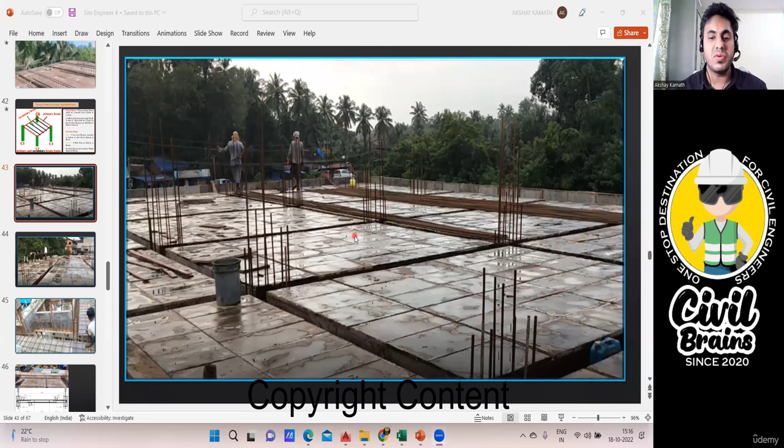In this lecture, we will see how to take out the slab centering quantities and also the slab concreting quantity. When I say slab centering quantity, all these are my slab centering quantities.

See this part, here. You can see all these pieces kept - these are the shuttering plates which have been kept. So this is my centering.

Why am I using the word centering? Because for the slab it is a horizontal element. For the beam, column, and footing, since it is a vertical element, we call it shuttering - everything was vertical there. But here we are placing it horizontal, so hence we should call it slab centering materials.

So how do you find that? It's very simple, I'll go back to the drawing again. Right now I'm in the first floor level layout. All the slabs have been given here. How do you find the slab quantity? It's very simple, first I'll tell you how to do the numbering.

Everywhere you can see the slab - one slab here, two, three, four. So what I've done, I've given a number to that. This is my first slab, I've given a name S1. Similarly, this is S2, this is S3 - okay, two times it's written S3, I'll delete this. So this is S3.

This slab is S4, then S5, then again S6. Then again we don't have a slab here. This is S7, S8, S9. In this way I've given the numbering from left to right, from top to bottom. You can give any name - you can even start naming from here, giving this as S1, S2, S3 and so on.

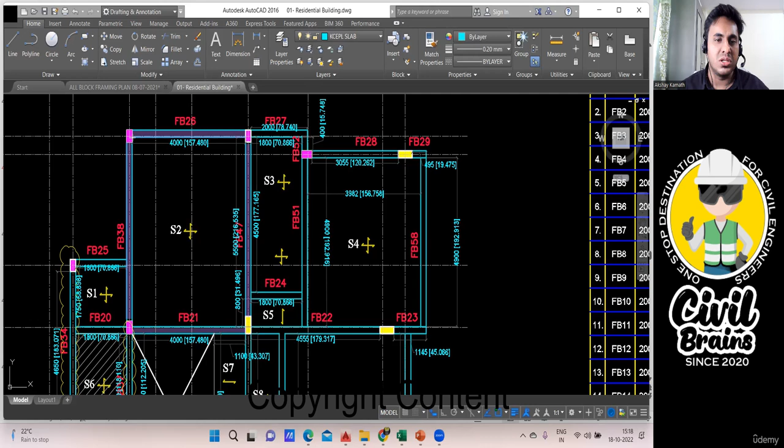Now, whatever is left out, that is the middle portion - this much will be your slab centering area. Agree with me? In the green color only your slab area will come.

Now how do you find it? From the AutoCAD, you take this outer to outer distance - that is from this column outer to this column outer. You take the distance, I already taken it - it is 4 meter, that is 4000 mm. So the breadth is over.

Now we come to this part. You take the distance from this beam outer to this beam outer - how much is it? 5500. You got the length, you got the breadth. If you multiply, you'll get the area. The slab will always be in area because centering quantity or shuttering is in square meter. I'll multiply 4 into 5.5 to get the slab centering area.

Got it? So practically, if you want to see this, I'll show you here. So this is how it looks practically. You have a beam here, agree with me? You have another beam running here, then another beam running here, then another beam running here - 4 beams are there.

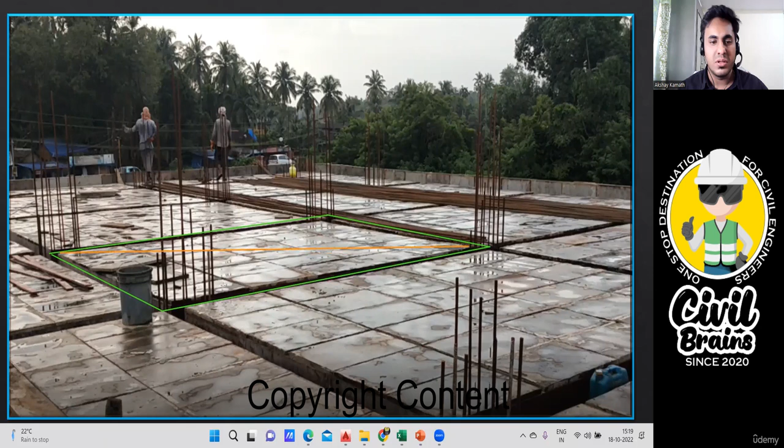In between this, whatever you have, I'll put it in a different color with an X mark. This middle portion, whatever you can see, that is your slab centering quantity. So we are trying to find this particular quantity - you're getting my point? I already told you, we need to measure the distance from here to here. I'll show you this in another slab if you want. Here I'll tell you how it has to be done.

Already you know that, so this is one slab panel what I have. I'll start from here. I'll take this length from this beam outer to this beam outer. Again, this beam outer to this beam outer. Both are same breadth. And from this beam outer to this beam outer, fine, I'll get this length. I'll get this breadth. If I multiply, I'll get the slab centering area. You're getting my point? Very simple.

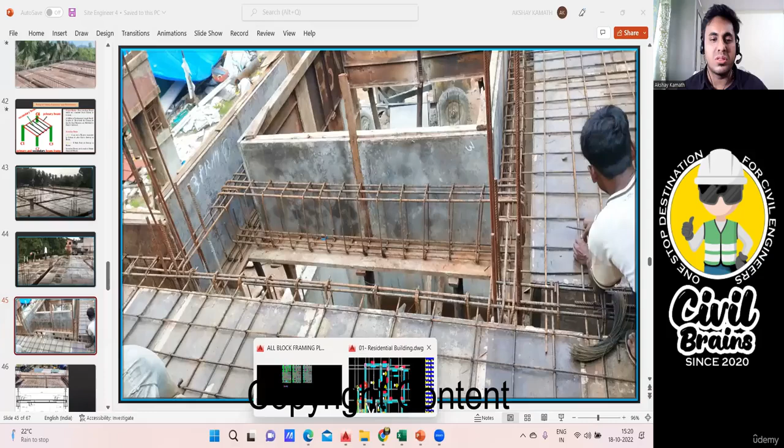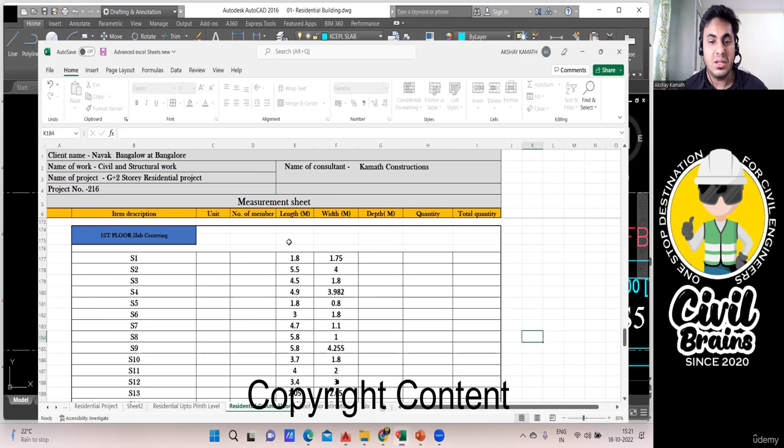So what I've done in Excel sheet, already I've done all those inputs. You just have to copy it or do it yourself. Like first floor slab centering, the length is first, I'll go with S1. I've written the name S1. I'll show you where S1 is. So this is my S1. So in S1, tell me what is your length. S1 is 1.8 meter and this is 1.75 meter. So 1.8 and 1.75, go to the Excel. I've written 1.8 and 1.75. Now I can come to S2 slab.

Where is your S2 slab in the drawing? So this is my S2 slab. What is the length? The length of S2 slab is, this is 4 meter, this is 5.5 meter. Whichever is bigger, you consider that as the length. So I'll consider 5.5 as my length and breadth is 4 meter. It doesn't matter, the answer won't change, but we'll follow this method. So 5.5 is my length and width is 4 meter. You're getting my point? So in this way, everywhere I've done the calculation.

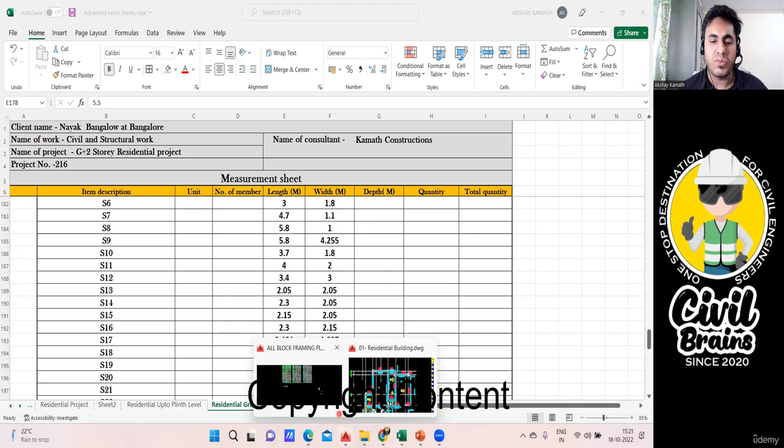And there is one small thing which you need to understand. In some of the slabs, they put this X mark. X mark means there is a cutout. Maybe there is a staircase coming, maybe there is a lift portion coming, or you want an opening in that portion. So when you prepare the drawing, you give an X mark. That means no slab is coming, so you don't have to consider this area.

Whereas you see, in this entire slab, this much is cut out. See, this is the actual slab. But in this slab, this much portion we have cut out. That means there is no slab in this portion, but the remaining portion you have a slab. So what I'll do, I'll take this outer to this outer length, which is 1100. And from this outer to this outer, I'll take a length which is 4.7 meter. For S7, I'll input the same thing in the Excel sheet. Where is my S7? You see here, 4.7 by 1.1.

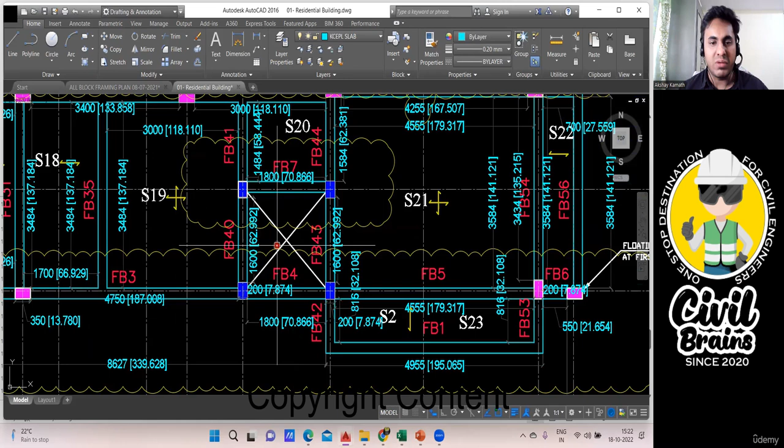You're getting my point? So in this way, try to calculate all the areas and fill in the Excel sheet. Again, you see here also you have a cutout, because if you go to the plan - I don't have the plan right now - here there is a lift coming, so that is an X. So if there is a lift coming, you will not put a slab, only in the top slab. In the multi-level, you will be having a slab coming in that portion. So you're getting my point? In this way, you're supposed to take care of all these things.

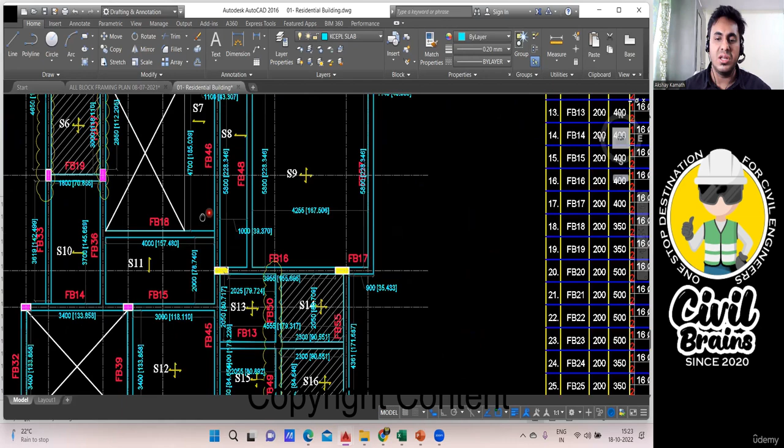And everywhere you do this. Similarly, see, these people have shaded something here. You can see this shaded portion. This means that it's a sunken slab. You have one shaded here, there's one other, two shaded here. Sunken slab in the sense, in the bathroom portion, when you give the slab - if this is my main slab, this is my ground level slab - my bathroom slab will be at least 200 or 250 mm down, and this will be the bathroom level slab.

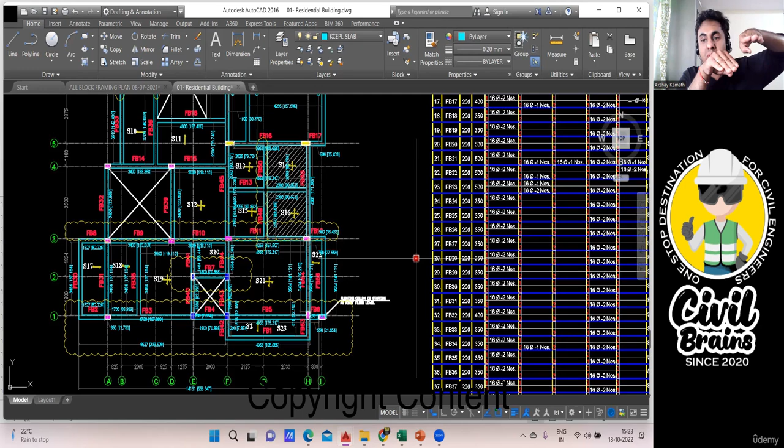You're getting my point? So this height will be 250 mm. Why do we do that? So that we can take the plumbing works and all, because in the bathroom you want water and all, no? The plumbing line will be taken, then you're going to put the brick bats, and then you will bring it to this level later. But initially when you do the casting, your main slab will be at this level and the sunken slab will be at this level. So wherever this line they have drawn, it's a sunken slab. In the remark, you can write sunken slab, for example S13 and S14.

No, this is 14 and 16. So I'll go to the Excel sheet. S14 is written here, you can mark this S14 as a sunken slab, just for your understanding, you can do that. But there won't be any change in the calculation. In execution, what will happen - wherever there is a beam bottom, no...

If this is my beam, my sunken slab will be at this level, attached to your beam bottom. The bottom portion of your slab will be at the beam bottom level. That's it when you do the execution. But in quantity estimation, there won't be any changes for the concreting and all, you can do that.

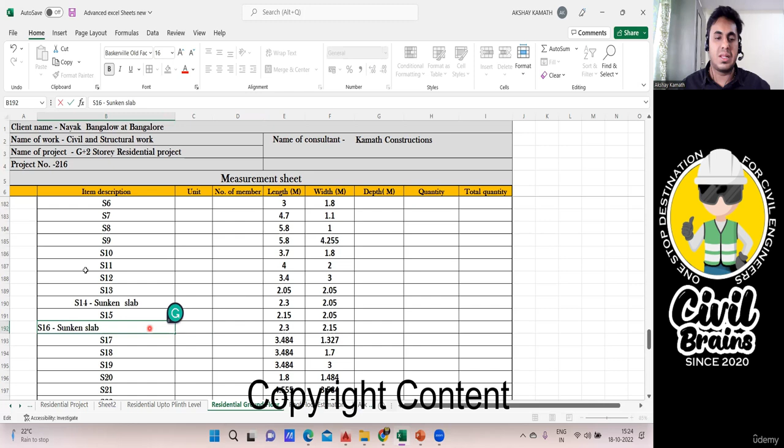14, written as sunken slab. You can write sunken slab just for your understanding. Sunken slab, that's it, okay. And rest all things, fill the value.

Now number units, since I'm doing a centering quantity, it will be in square meter. I'll drag it everywhere. So yes, 23 slabs are there. Sunken slab, and this number will be 1 only always. Number is 1. Now you want to find the area, no?

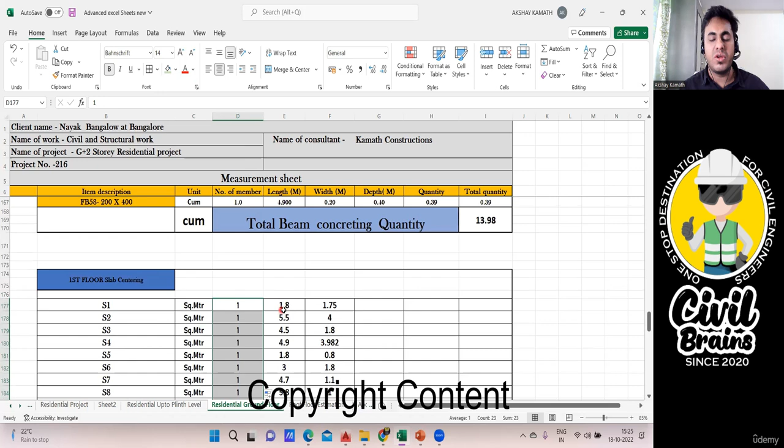So quantity, I'll write. So we know we have a length, we have breadth. This depth is not required. You can do a dash mark here. Bring it at the center, make it a little large. Okay, done. That means there is no depth portion.

Now quantity, quantity, I want to find area, no? So this 1.8 multiply by 1.75, area I'll get 3.15. Bring it at the center, increase the font, that's it. One I've done, just copy for others. Copy, you'll get all the answer. You can reduce that size. Yeah, done, okay.

Then again, coming to the total quantity, will be equal to 3.15 into number. Since here only 1 is there, so values won't change. Done, okay, this you can reduce.

Fine, now first floor slab centering quantity equal to, or I can just keep my mouse here, go to the option called auto sum. It will get selected, enter. So 184.60 square meter of centering is required in your slab. Simple, this is how you're supposed to do it. All the values I've taken from here, you also try to do.

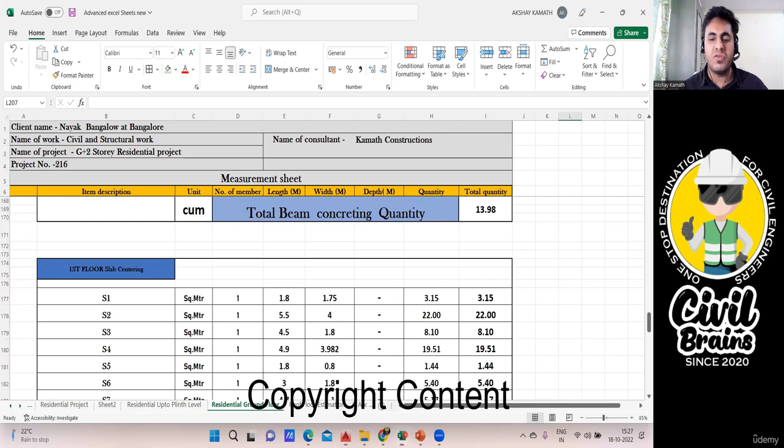Most of the things what I've done is correct. See, one thing, somewhere when I do the calculation, in some portion I may miss some value. So this is the final answer what I'm getting. If you're getting the same value, no problem. If you're getting somewhere close, like if some students get around 183, then you tell sir you got 184, I got 184.60, it's okay, doesn't matter.

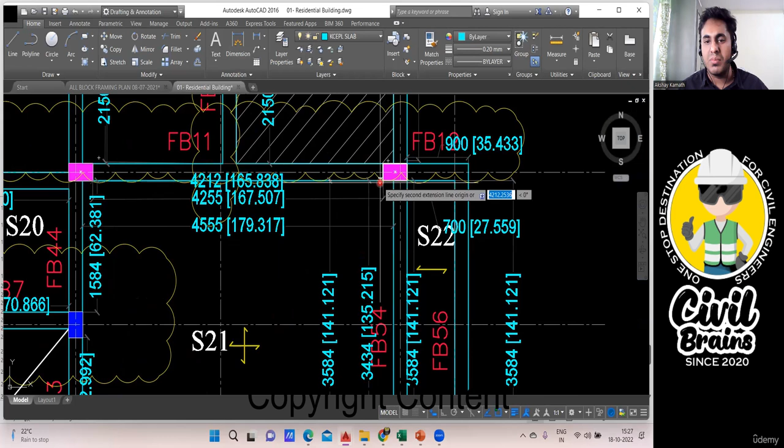It depends, because maybe either I might have made a mistake while taking the value from here. Somewhere here, instead of taking this from this end to this end, I might have stopped my mouse somewhere in a hurry, and I might have taken this 4212, where actually I should have taken 4255. I might have taken 4212. Usually I have not done that, most of the things I have double checked it. But in case if something happens, it doesn't matter.

Don't think that whatever answer you got is wrong. So it's okay. See, if there is a huge variation, then it is a problem. For example, I got 184, and if you're getting like 183 or 185, it's okay. But if you're getting like 150, then maybe either I might have made a mistake or you might have made a mistake. But if you're getting very close to this answer, or the same answer, well and good. If not, if you're getting like 183 or 185, doesn't matter, you can go ahead with that. Slight variation will be there, depends how you've taken the values and all, doesn't matter. Fine, so the first floor slab centering quantity is done.

This you have understood. Now, I'll tell you one more thing which is usually not required, but from site execution point of view, it is required. So this is the first floor slab centering total quantity. Now, when you do the execution of such slab on the site, you need to bring in such plates. These are the plates what we have, these are the centering plates. You can see this is my centering plate.

This is one plate, okay, this entire thing is one plate. In this way, we try to bring it, and then we try to arrange it. All these things are explained in my construction methodology course, where I taught you step by step how all these things are practically executed.

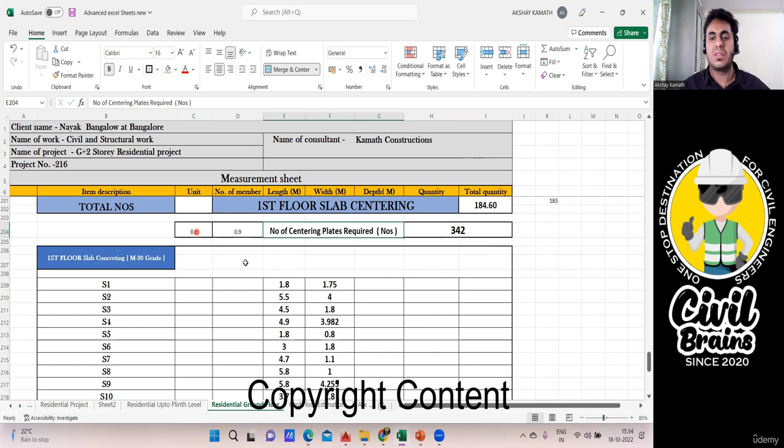That's it. So I hope up to here your concepts are clear.

So again, we'll do the slab concreting also. It's pretty simple. For slab concreting, whatever you did here, everything you copy. I think I copied, I'll copy from here once again. Same thing you have to copy, there's no changes in that. Copy and paste it here.

So make this as first floor slab concrete quantity. Now, since it's concrete quantity, this will be cubic meter. Change it, drag it this way, make it cubic meter everywhere.

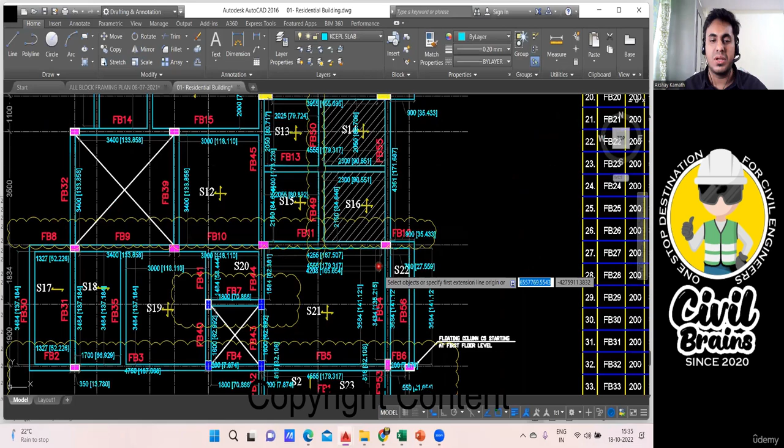Done. After that, I want this thing now. Length is done, length is same, breadth is also same. Here I want the depth of my slab. For the depth of the slab, you go back to the drawing. But here you won't get anything, depth of the slab isn't written here. You have to go to the slab schedule.

See, here there is a schedule of slab given. They have mentioned S1, S2, S3 - there are two types of slab, one-way slab and two-way slab. All these things I've explained in my site engineer course, what is one-way slab, what is two-way slab, how do you put that in. I'll not repeat that again.

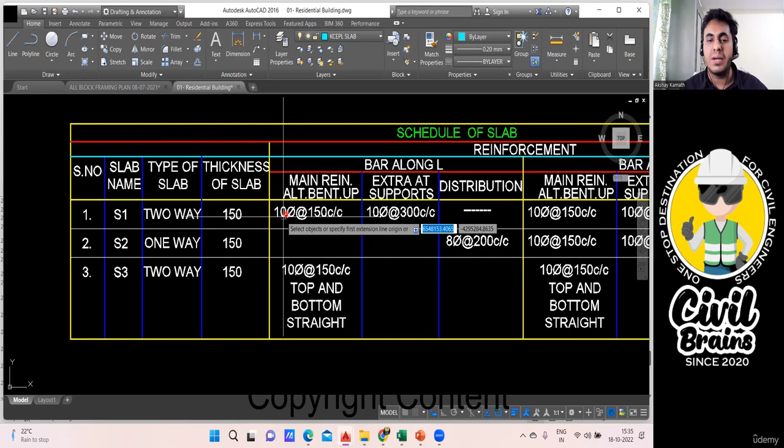You see the thickness of the slab given as 150, 150, 150. That means throughout, in all your slabs, thickness is 150. So our task becomes very simple. Just come here and write 0.15. That's it, I've written 0.15. That is the depth or the thickness.

Should you call that depth or thickness? It is thickness because it's a slab - for slab we call it thickness, for beam we call it depth. Okay, drag it up to here.

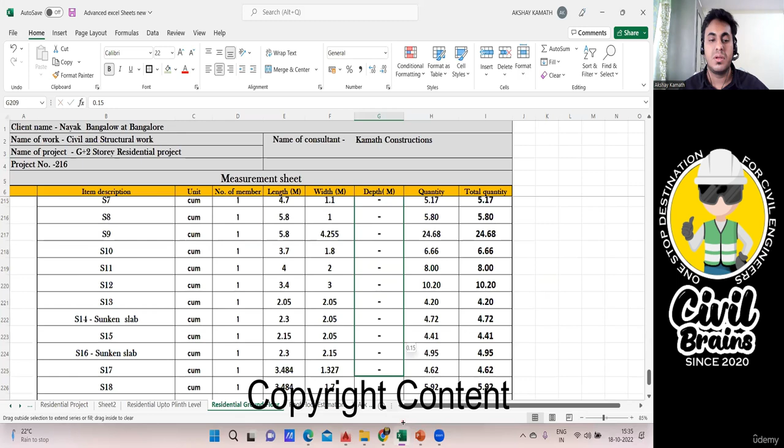Done. But again this Excel won't work out because when you did this row formula, you multiplied only 1.8 into 1.75 - you can see this and this you haven't multiplied, so we'll have to change it now, or you can multiply by 0.15 now. Fine, 0.47. Now just drag it everywhere, you get the total slab concrete quantity.

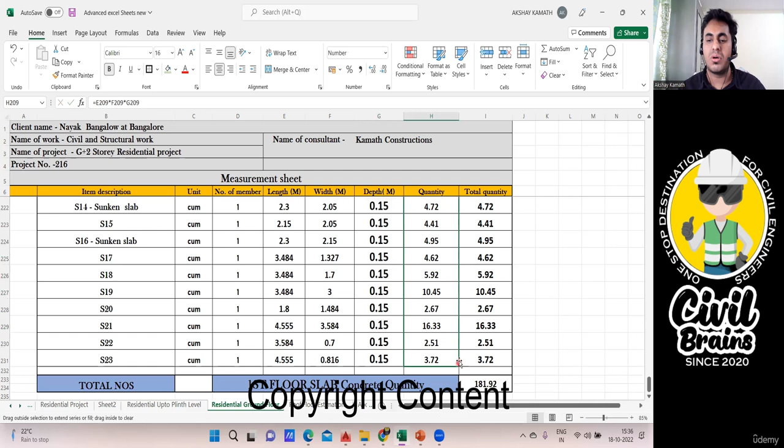Done. So you require how much? We'll verify one answer: 4.555 into 0.816 into 0.15 equals 0.557. Yeah, correct, no problem.

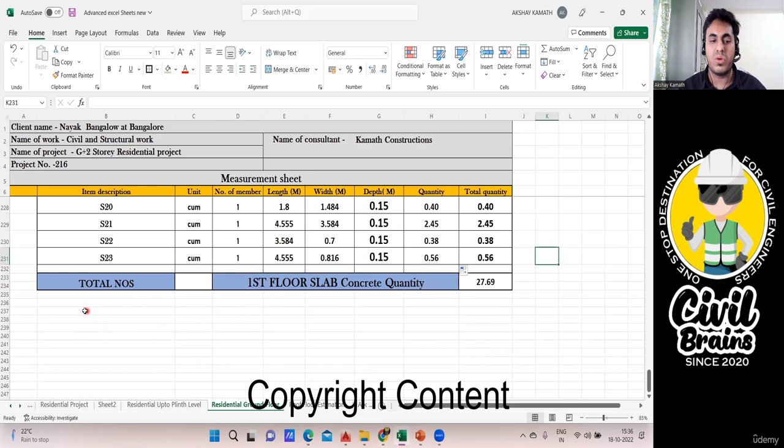So total, if you want to do your first floor slab, total concrete quantity required is 27.69. But when we order the concrete, we'll do the concreting of the slab and the beam together. So you can even write here, first floor slab concrete quantity is written. So total, if you want, you can make one more row here. I'll merge it.

Total first floor concrete quantity. This you can put in brackets, like including the beam plus slab, because we calculated separately - for beam we calculated separately, for column, for slab we calculated separately. That is why I'm writing this final note here.

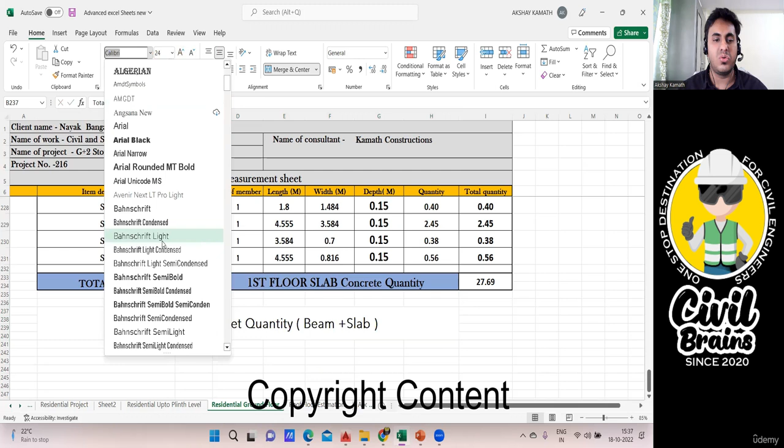See, all these things, it depends on you how you want to do it. This is what I practice, you can practice the same thing. If you have something else in mind, you can do that also. Ultimately the answer should remain same and it will come same, because it is mathematics. So 2 plus 2 is 4 - either you do 1.5, or 0.5, 0.5, 0.5, 0.5, then also it is same. 1 plus 1 is also 2.

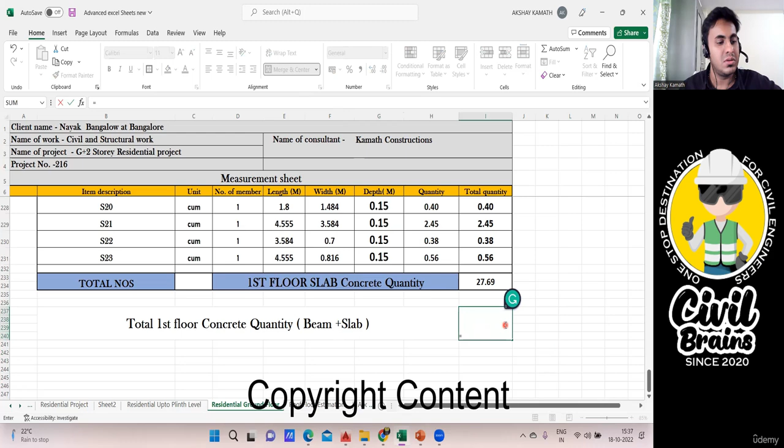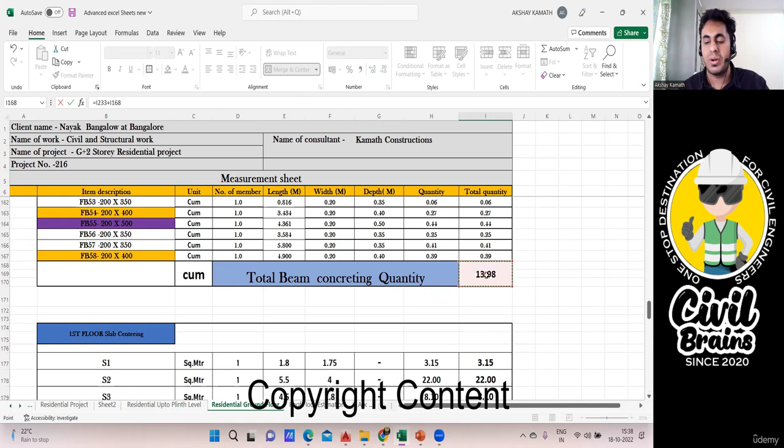So what I'll do, I'll say equal to sign: first floor slab concrete quantity plus - where is my beam concrete quantity? Beam was somewhere here initially. Total beam concrete quantity 13.98. Enter.

So totally, if I want to do my first floor slab concreting, I require 41.67, that is 42 cubic meters of concrete. If I get that, I can finish my first floor slab work - first floor concreting work can be finished.

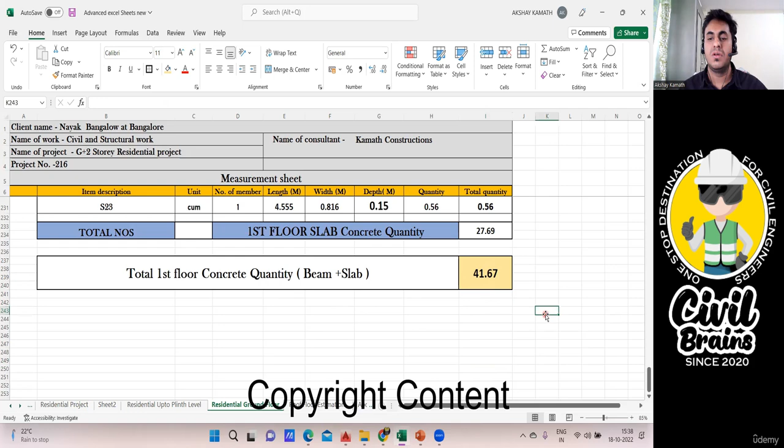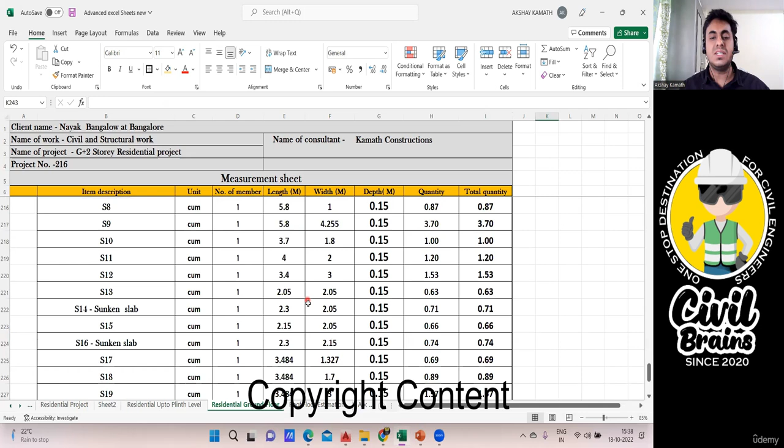That's how it is. So we finished the concreting part, we finished the shuttering part, we finished the beam concreting and everything. So first floor, all the things whatever we are supposed to do, everything has been done. So in the next lecture, we'll try to go for the second floor and so on. So we'll see you back in the next lecture. Thank you.